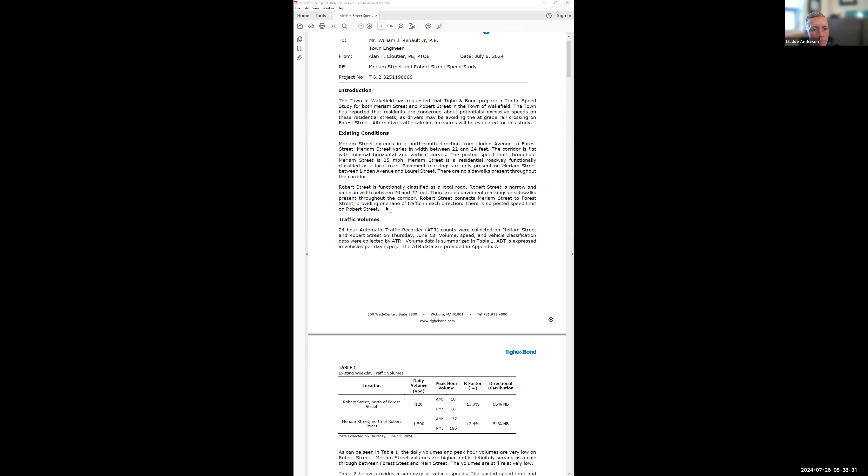Okay. So basically, looking essentially at the speed related items. The big one we want to look at is our 85th percentile speeds based on speed limits that are out there. And you can see that going north of Robert Street, we do have speeds in excess of 5 miles an hour. Typically, we look at 10 as our magic number to see if it's really an issue. Although we do see some sections where some of the speeds were recorded to be upwards of 43, 42 miles an hour, which I'm sure is what most of the folks are seeing out there and what you folks are probably focusing on realistically.

So we've identified a couple of options and recommendations from Tighe and Bond on ways to look at improving. The first deployment would be the radar speed sign, so folks will know what they're doing, posted with the actual speed limit for the area. So that's what I'm proposing at this point that we would move forward with. This would also collect additional data, so we'd see if this is working or if it's not. If that's not working after we look at it for a few months,

we would look to move into a chicane configuration, which really alternates and makes folks have to slalom through the straightaway. So we would have little bump outs in different sections that would be staggered that would require folks to go around them to slow them down. So that'll be more of a built condition. That's how we would look to correct the problem out here.

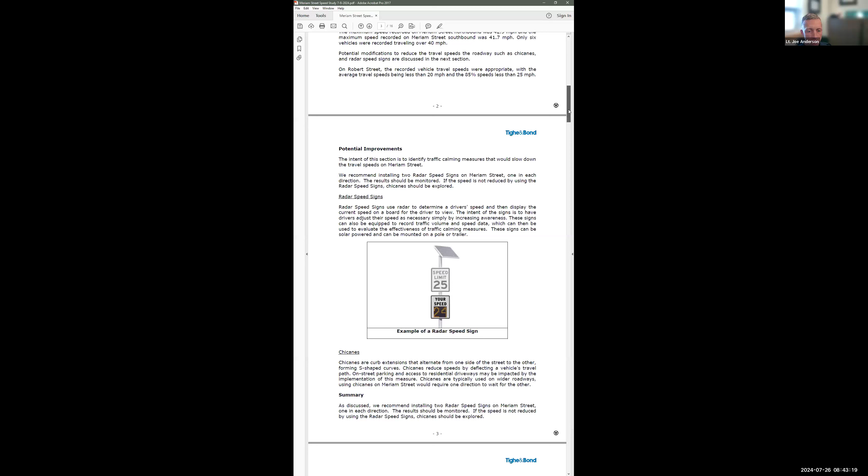But that's temporary. We do have some of these signs that are easily deployable, but the DPW does a great job getting them out there and moving them around as needed. Those are to hit areas in town where the speed trailer would be taking up the whole sidewalk, or could be struck in the middle of the road, or there's no good place to put it to get solar. So we have those smaller signs that we deploy and move around,

but this would be a more permanent solution for the time being for Meriam Street. It wouldn't be moved. It would stay for the length of time that's determined by the policy. And then at that point, we would reassess. So I'll turn it over to Danielle.

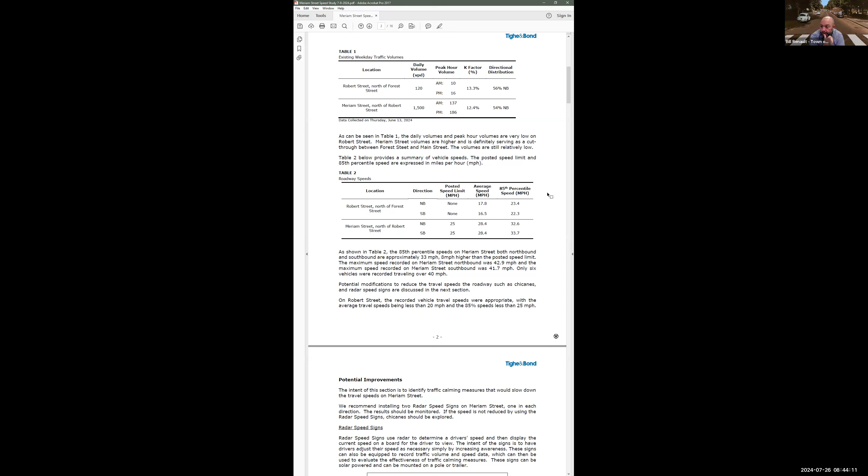If I can just chime in quickly, just to highlight again, we also looked at Robert Street as well. Those are well within the speed limit currently, so we wouldn't be looking to deploy anything on Robert. It would just be on Meriam. Right, and Robert Street, I don't even think meets the volume. Under 400 vehicles per day, 0 points are assigned per the policy. Whereas Meriam Street does see a bulk of the cut-through traffic.

They're at, according to the study, 1,500 daily volume, and our policy says anything over 1,000 to 2,000 is assigned 10 points. No sidewalks assigns an additional 5 points, and then depending on what 85th percentile you're looking at, if you look at the 33.7 rounded up to 34, you're talking about roughly 9 miles an hour over. That brings it into the 10-point range, again, because it is a 25-mile-an-hour zone there. It's a special speed regulation.

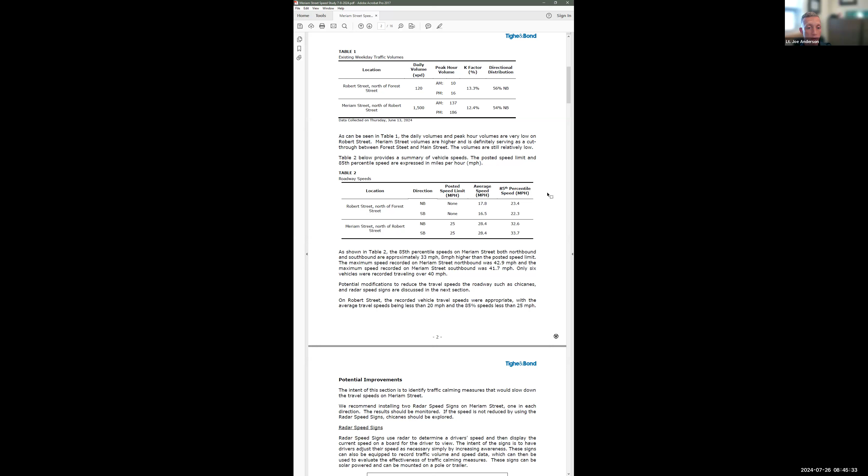So that would be a criteria that we would weigh whether we spend the 6,000 to 7,000 on these signs, which is roughly what they cost, against another street that might be competing for a similar traffic calming measure. But as it stands right now, this is the only active application that's progressed to the point of obtaining all the signatures, having a speed study done, and being ready to move forward with a traffic calming measure. So I see no reason to hold this up and rank it against potential other applications. It's a fairly low cost item, so I think it's something we should move forward on.

Anything else from any members of traffic advisory before I turn it over to Danielle? All right, Danielle, what do you have for us? I just wanted to thank you all for taking it into consideration and having such a very structured process to go through. I appreciate that, and I know everyone in our community is going to be really appreciative of this.

The only other thing that I wanted to note is that there's no stop signs in our neighborhood. I don't know if that's normal, but not even at the end of Meriam Street going towards Forest. At Forest Street or at Robert Street? Forest.

Okay, yeah, we can. Forest and Meriam, that makes sense. We can make that happen. Yeah, it's just very weird how there's no stop signs. Like, people stop, but that was the last comment. And again, thank you. I appreciate it.

Do you know time-wise when we would expect to see things start to move forward? So typically, according to our policy, we'd have to now have you take this application with the estimated costs for this traffic calming solution, have everybody sign off on it, and that they want to move forward with it. But I think, Bill, correct me if I'm wrong, that's going to be more for a permanent solution. Like if we were going to install the chicanes or do something that's going to be a real big ticket item. That's how I've always applied it.

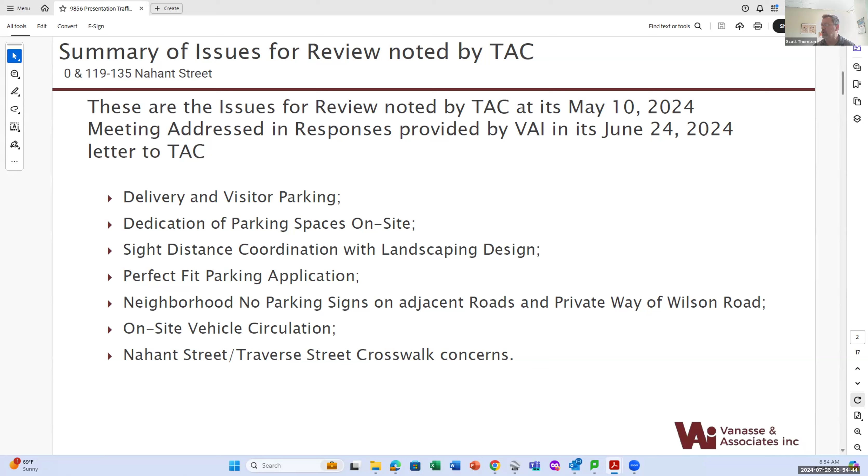So the first issue related to delivery and visitor parking, and I'll jump to the site plan in a second, but there were questions about where vehicles and certain activities would take place. We had proposed that there's 4 spaces along the west side of the building. We're proposing that moving trucks can park in those 4 parallel spaces. Parcel and mail delivery can also be accommodated in the two southernmost spaces along that driveway.

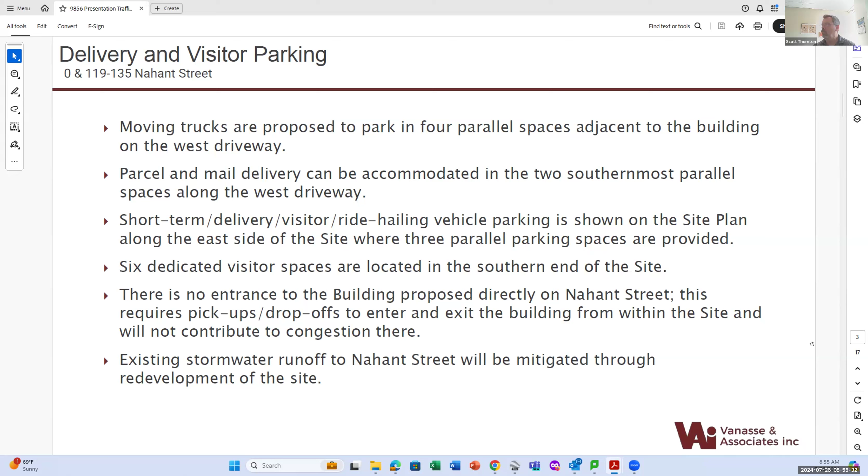I'm just going to jump to the site plan for a second. So these are the spaces that are in question. There's 4 20-foot spaces in this area. The southernmost spaces that could be used for package delivery are in this area. The mail room is in this general vicinity, so that's the shortest walk to get the materials delivered. A second area for short-term deliveries is in the 3 parallel spaces off on the east side of the building.

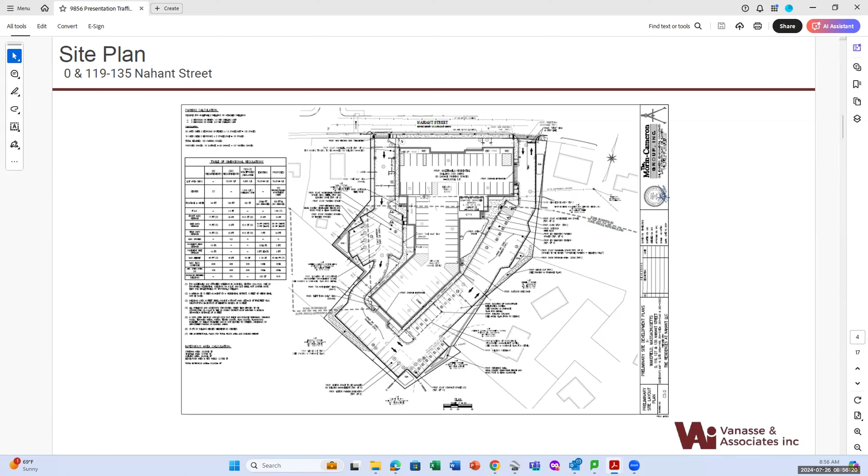Scott, could I get you to blow that up a little bit? Sure. Much better. Okay.

So the three spaces are in this area, right opposite the lobby. We expect that for things like Uber pickups, Uber Eats, these are the right locations for those activities to take place. We're proposing that there'll be wayfinding signs located at the driveways for trucks to enter the west driveway, probably post them at the east driveway as well. There's better visibility in this area in the case of pedestrians walking back and forth between the Uber vehicles and the lobby. So we anticipate this is a better location for that activity to take place.

There was also a comment about visitor spaces. There's 6 visitor spaces that have been dedicated in this area. We think that this is a good location for the visitor spaces because obviously we want to maintain the closest spaces for the residents, as they'll be the ones that are going to use those most frequently.

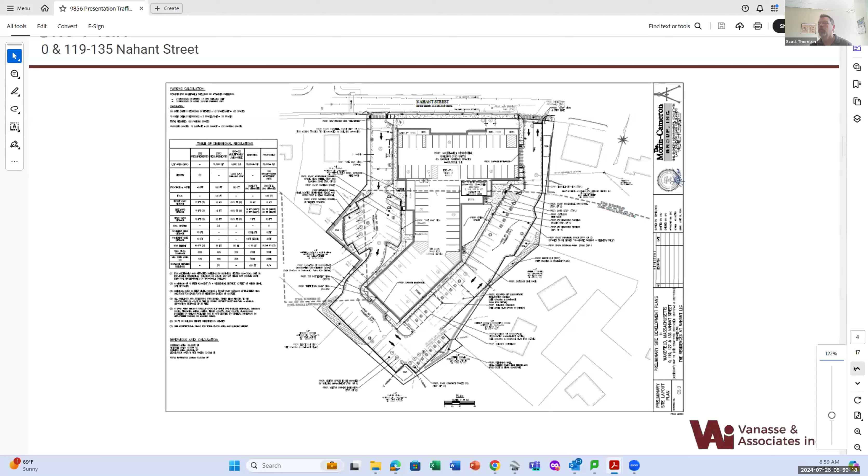And Scott, on the west driveway, were those few spaces there for moving trucks? Did I read that right before? Yes. Could they potentially be used for delivery drivers as well? They could be, yes. And possibly an ambulance or a fire engine could park there, although where's the entrance? The only entrance is on the other side, or is there a second? No, I believe there's another entrance right in this area. Okay. All right, just wanted to clarify that. Thanks.

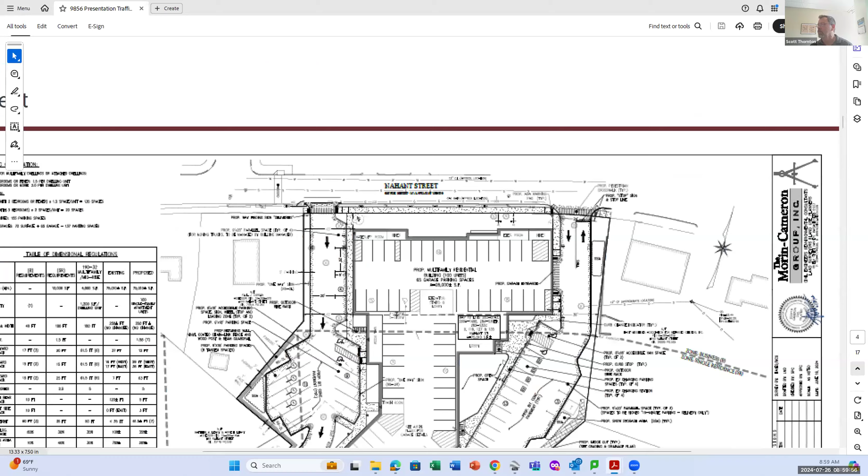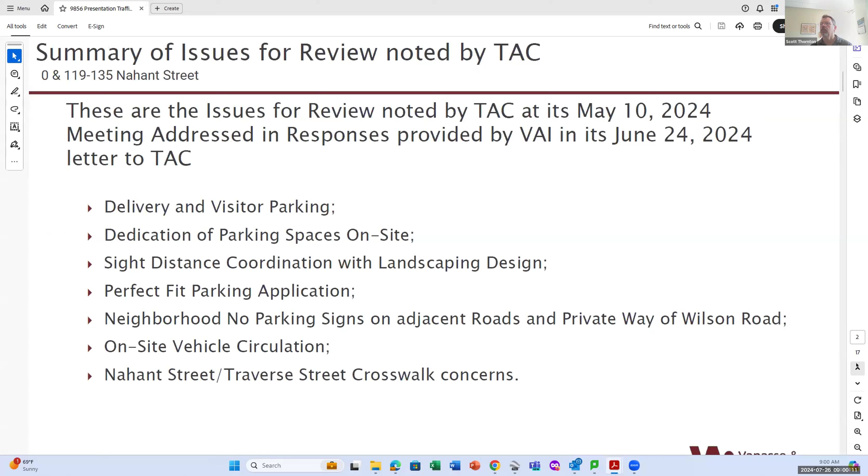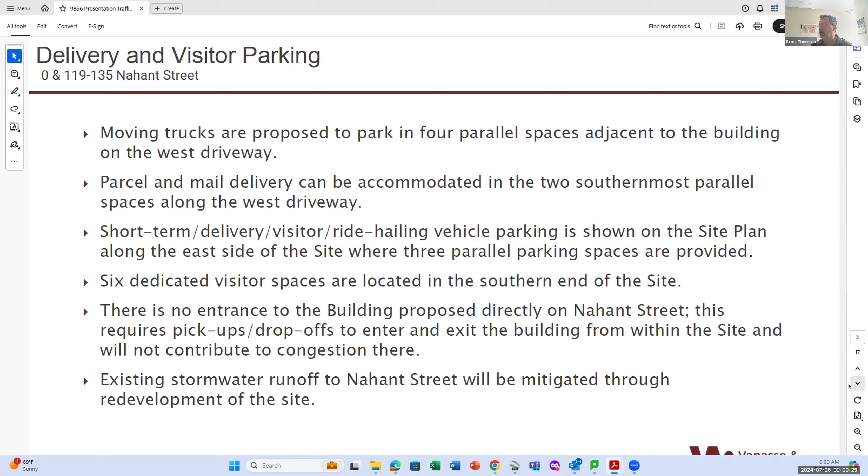Right, so back out here. Right, so the last comment that I wanted to touch on was that there have been concerns about stormwater runoff from the existing site that currently goes out to Nahant Street. Scott Cameron can get into more detail on that if needed, but in general, the way the site is being designed, all the existing runoff or drainage on site will be captured on site, so there won't be any runoff onto Nahant Street once the development is constructed. The plan is to retain all that drainage on site.

And if I may just jump in very quickly, that came up in the context of a safety issue in freezing. The concern expressed was there'd be more runoff generated from the site that would freeze along the sidewalk in Nahant Street, and we want to address that head on. Scott can speak to it much more clearly, but that is not going to happen. As Scott Thornton indicated, all runoff is being handled on site. And we make the condition better, not worse, than the existing condition. Thank you.

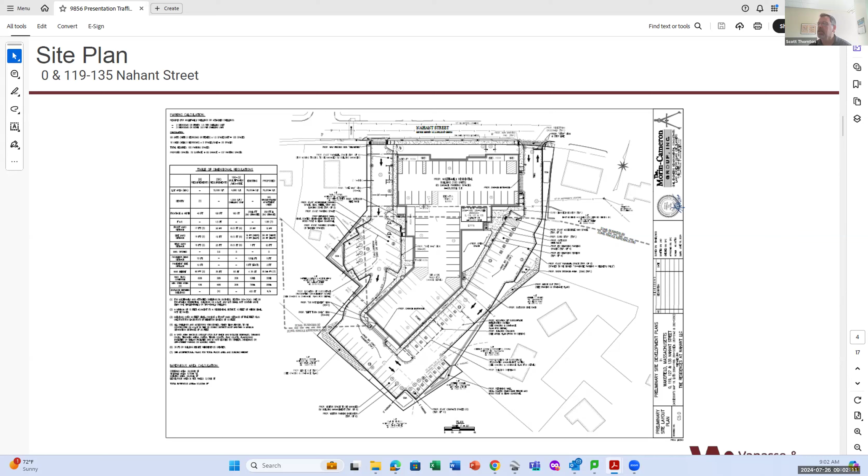So then, discussion of the parking spaces on site. I believe there had been some discussion from the TAC about dedication of spaces within the garage and in the tandem area in order to minimize the potential for hunting around for parking spaces. We think that's a great idea. So what we're proposing is the spaces in the northern garage, accessed from the connection to the east driveway, and the lower garage. These garages are not connected, but the lower garage is accessed through a connection to the south, and there'll be do not enter signs posted where the west driveway comes into the south part of the parking area. These tandem spaces are proposed to be reserved for residents with more than one car or in the 2 and 3 bedroom units.

Similarly, the spaces in the garages would be dedicated. We expect that they'll be more coveted for weather protection than the surface spaces, so those will be reserved for specific users to minimize that hunting around for a parking spot. And then we have 4 EV spaces, located in this area closest to Nahant Street. That had been a common theme the fire department raised with the EV chargers. They wanted easy access to those spaces and not have them in the garage, so in the event of a vehicle fire they could get to it quickly. So that's the proposal for the EV spaces.

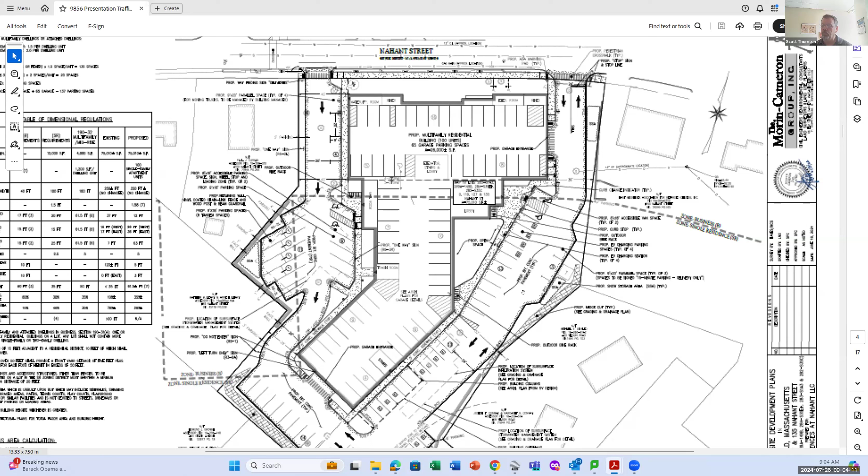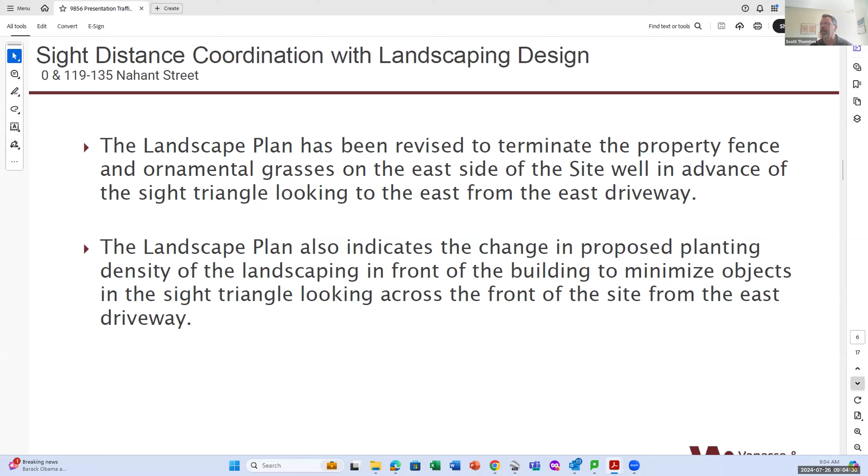Okay, so we went through these. As far as the sight distance coordination with the landscaping design, admittedly, the sight distance was addressed, but the landscaping design needed to be tweaked a little bit to account for it. We previously had a vinyl fence that went out past the edge of where a vehicle would need to see for the sight distance, looking to the right. That has been pulled back, and landscaping has also been pulled back away from the edge of that fence.

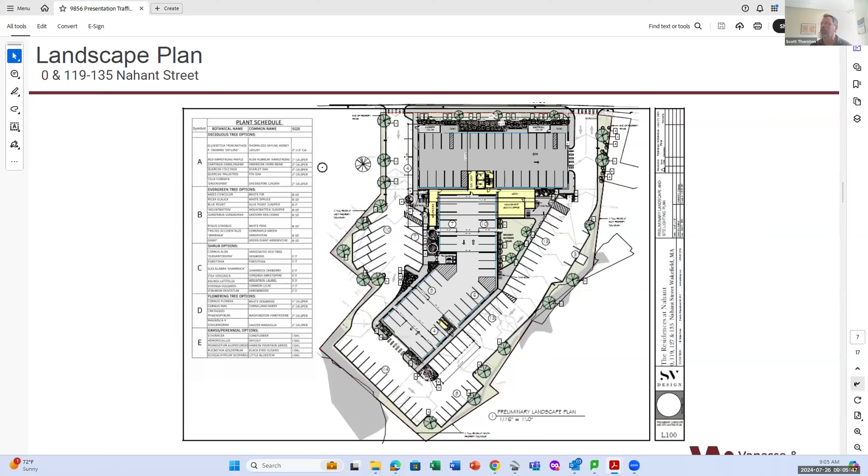And I don't know if you recall, but the landscaping in the front of the building had been pretty dense, a number of trees and shrubs proposed right along the back of the sidewalk. That has been cleaned up a little bit, de-densified, if you will, so that there's more visibility for a vehicle looking through the proposed vegetation. And this is what I'm talking about. In this area, we wanted to minimize the landscaping so that it's less restrictive to a vehicle looking to turn either left or right out of the site.

Next issue was the perfect fit parking application. And there's a lot of information here, but basically what we wanted to show was that the perfect fit parking report has a pretty substantial database, initially looking at 200 developments. Up to the latest phase, they've looked at 211 complexes.

Parking in general was provided at a rate of between 0.25 and 2 spaces per unit, with an average of one space per unit, but only 70% of those spaces were full when surveyed. And in affordable housing developments, the parking rate was observed to be even lower at only 0.55 cars parked per unit.

Through the latest phase, which goes to locations further away from Boston, looking at Needham, Newton, Sudbury, and Waltham, 211 apartment complexes have been studied with an average demand of 0.75 spaces per unit. In fact, those 4 towns have actually got a rate of under 1 space per unit, and that's based on the surveys done at night for peak demand period for residential developments, and showing a demand ratio of 0.9 spaces per unit.

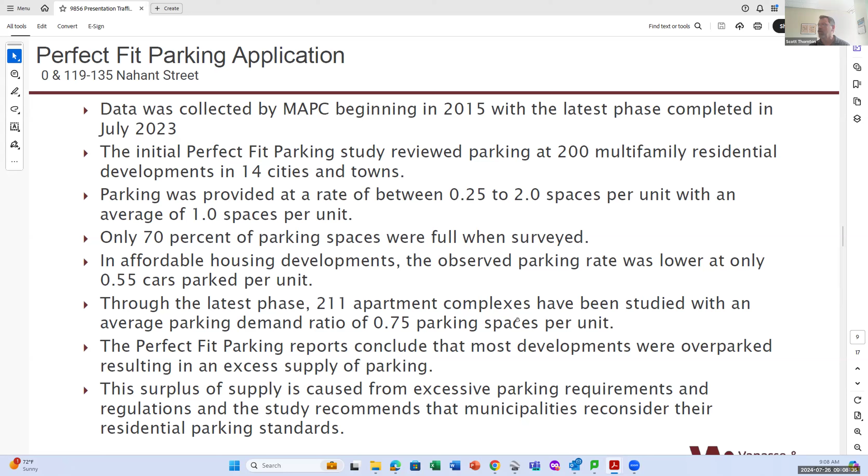Secondarily to that was access to jobs and deed restricted affordable housing. But the surplus of supply is caused from excessive parking requirements, and the study recommends in general that municipalities reconsider their residential parking standards.

The next issue had to do with no parking signs. Parking on side streets for residents is allowed in the existing conditions. And we still think that the development is going to have sufficient parking supply for the residents, the guests, and visitors, and there will not need to be any parking off-site. I know we had made this point previously that we don't object to any installation of no parking signs on adjacent streets if the town is willing to do that or feels the need to do that.

There was some discussion about Wilson Road, how it was a private street, but there were still people parking on there that were not residents. If it is a private street, then no one who lives on Wilson Road has a right to park there. And Attorney Panos has offered to assist the residents on Wilson Road to install no parking signs if it is a private street.

Scott, I just want to touch on this one while it's fresh in my mind, because I'll probably forget. But as far as the no parking signs, I think it might have been a little bit misunderstood. The point that we were trying to make with having the developer install no parking signs is that now it would restrict the ability for neighboring streets to have the occasional on-street parking space. And I think that's what we see right now.

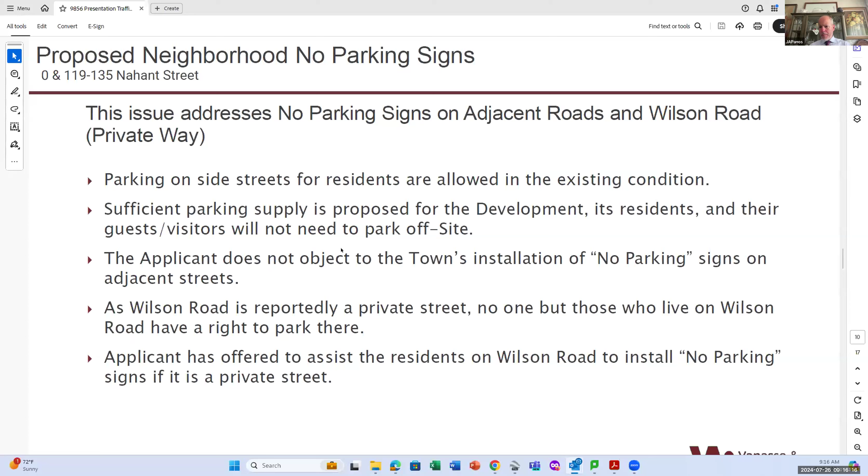Next issue had to do with circulation on site. So we ran AutoTurn exhibits and analyses depicting the paths of trash, delivery, moving trucks, emergency vehicles, and passenger vehicles through the site layout. Again, trucks are proposed to enter the development at the west driveway and exit from the east driveway. Passenger vehicles can enter from either driveway, and then circulate out through the east driveway.

This is the fire truck AutoTurn analysis. We showed the fire truck entering from either driveway. We also showed them exiting either driveway, realizing that most likely they'd be coming in from the west, but if for some reason they came in from the east, they could come through and circulate to the back.

Again, there's room for trucks to pass each other in the back if need be. And then we assumed if that truck needed to exit out through the west driveway, it would be possible for them to do that. This is for the fire truck. We have an analysis of the passenger vehicle. There's no issue with them coming in from the west driveway, from the east driveway. We wanted to show how they would come in. If they wanted to turn around, they could do so using the entrance to the garage.

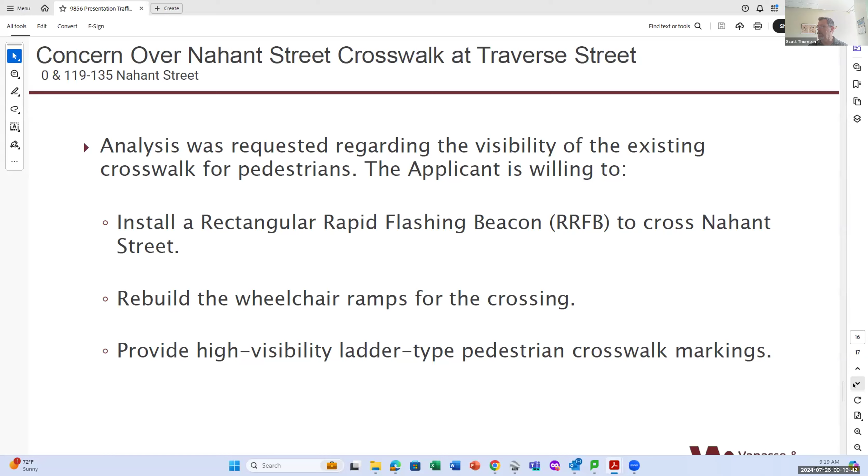And I think the last issue had to do with a concern of pedestrians being able to cross Nahant Street. The existing crosswalk at Traverse Street is faded. The wheelchair ramps are probably not compliant with ADA. And the applicant has agreed to install a push button flasher, RRFB, rectangular rapid flashing beacon, for the purpose of assisting pedestrians to cross at this existing crosswalk.

We're rebuilding the wheelchair ramps there, and then again the push button activated flasher would be installed according to the ADA regulations. I think it's within 4 feet or 3 feet of the actual ramp, and it would be consistent with the current regulations for APS devices. And this is something that the applicant has agreed to install not just for the residents' use, but for the public's use, in order to cross Nahant Street with some assistance with the RRFB, with the flashing strobe lights that get people's attention when they're traveling on Nahant Street. That concludes my presentation. I'll be available for any questions, Lieutenant.

Scott, if a vehicle was exiting the west driveway, which I know has a one-way circulation there, what is the ISD looking left? So let's say a fire engine or wrong-way driver was exiting left. Do you have that available? We looked at it a while ago. I don't have that number in front of me. If the fire truck was exiting, their vantage point is over 6 feet above the pavement, so it's a different criteria than for passenger cars.

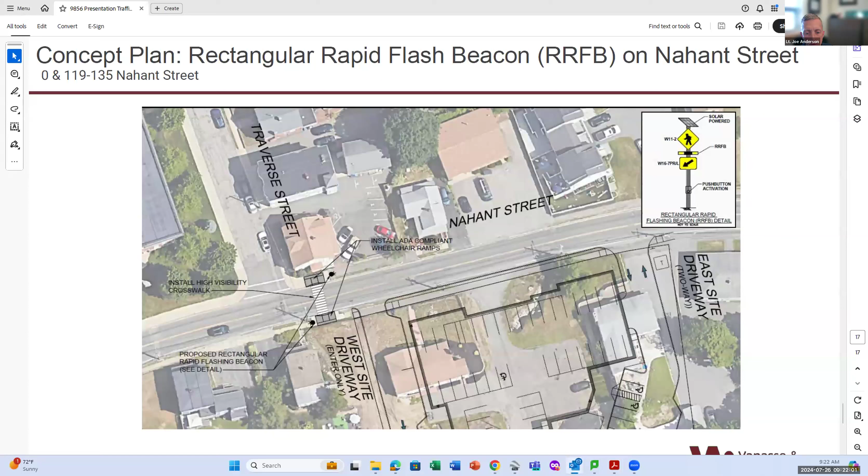I think my concern, and then I'm going to open up to members of TAC, but since we're on this slide, fresh in my mind: let's say there's an ambulance loading a patient over by the delivery space on the east side, and there's a police cruiser there. Just some routine activity that clogs up that two-way east driveway. Your Uber Eats driver, your impatient 18-year-old driver, whatever scenario you want, might go out that wrong way. And I'm curious what that intersection looks like as far as sight distance.

I don't recall exactly what it was, but I think it was poor enough that it was shifted to the east driveway. I have it up, Joe. Yeah, in the original study, the sight distance for the west driveway was recommended 320 feet looking to the west, 290 looking to the east, and the field measurement was 435 looking east and 164 looking to the west. Okay. That's part of why we shifted the access configuration and had the exiting vehicles on the east side. Gotcha. Bill, do you want to start off and then we'll move through?

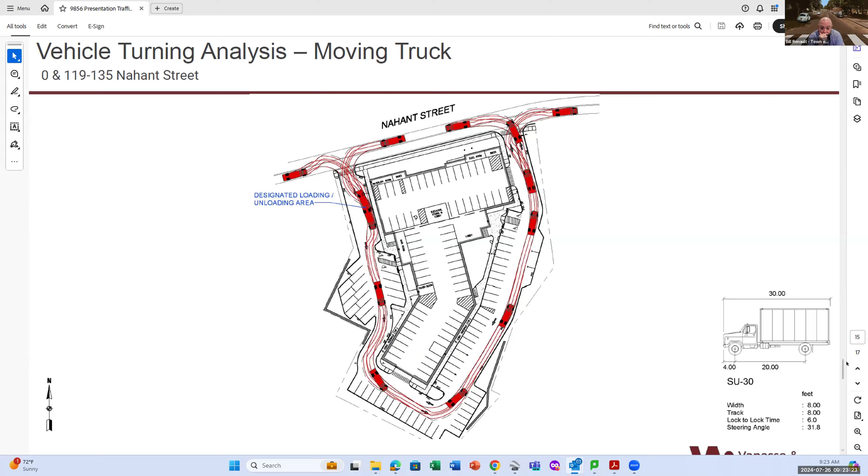Yeah, I'm going to focus on the same piece with the intersection sight distance. Scott, if you jump back to the one that showed the ISD with the little yellow triangle, right? So we're looking at a section for the only exit here for the site that has 160 feet. Where if you reconfigured the site, I don't look at this project as we can only look at the two driveway locations.

You can easily make this work and have the proper intersection sight distance if the existing driveway was used as the driveway for the project. I mean, I get that you want to maximize this building to the nth degree, but you definitely have an ability to solve this potential safety problem that we've highlighted a couple of times. Obviously, it's not just you, it's the team, as the design team. I mean, this is very solvable.

And to me it just doesn't seem to jive. I said when I was on the ZBA meeting, I don't like the location of the trash truck because you're in the one-way drive aisle. At least it would need to go to the other drive aisle so that people can get around it. I don't like the configuration of how you have half of your folks entering where potential fire trucks will be blocked. You would have a trash truck that's going to block it that we know is going to happen.

If there's a chance for any of the deliveries to happen in that location where you're planning it, people still can't get around. I mean, all of those, to me, you're kind of designing into pinch points and into problems based on a building that you folks are assuming is fixed, which shouldn't be. And these things need to be addressed. I mean, we've gone back and forth whether the building's too big for the site. Yeah, I think everybody probably thinks it is.

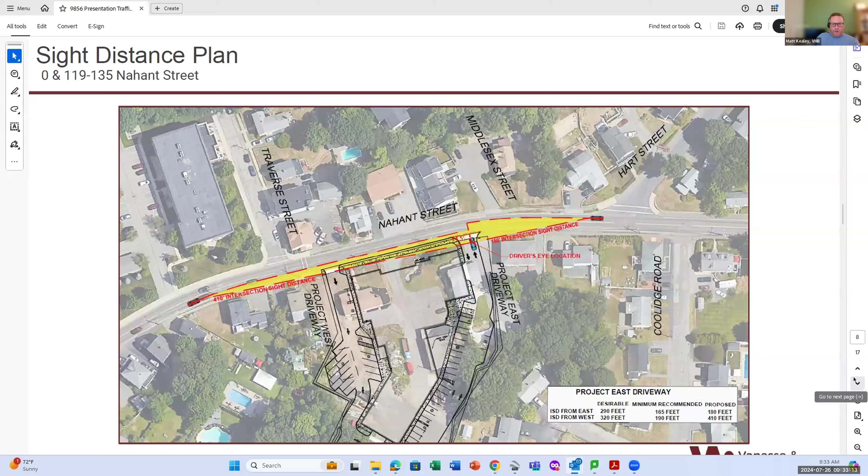Matt, anything else before I continue? One minor clarification just on the site circulation. I wasn't necessarily focused too much on the auto turn and whether or not vehicles could reverse direction. It's just the fact that that's your permanent condition, that someone coming into that driveway and driving to the back of the building, if they don't find a space, they have to turn around. I think it's just an undesirable permanent condition. I appreciate that they can make the 3-point turn and turn around, but for everyday living, that's kind of undesirable in my opinion.

Right. So I think this graphic was specifically prepared because there was a comment that said what happens when people come around from the east driveway and need to turn around. So that's why. I would think most people would come in from the west side or the west driveway, and they have the more spaces that are available for them.

Right, but if someone comes in from both directions, they meet at the bottom of that driveway there, and one of them has to turn around. Yep, but there's sufficient room. I mean, no, I get it. It's just not ideal. It's not that they can't do it. It's just some undesirable interaction. That's all. Just wanted to clarify my point from last meeting.

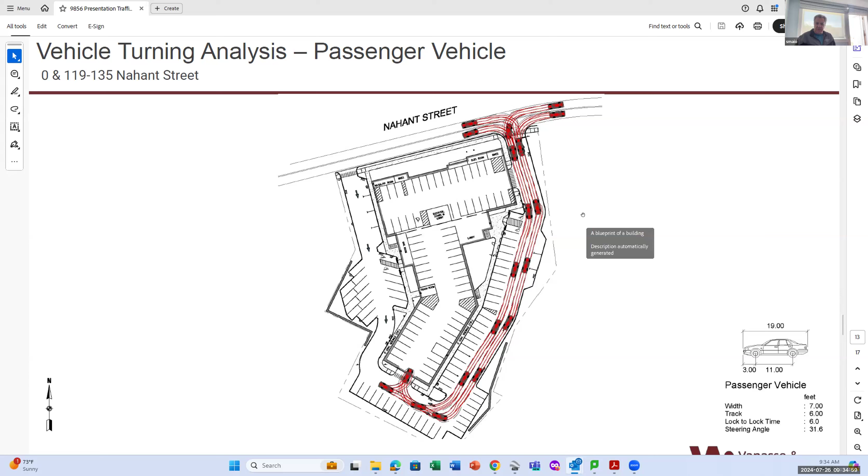Hey, Mr. Mayo, do you have anything for us? I'm just going to go through the members. Sorry, I'd like to hear from, I think I saw Deputy or Provisional Chief Purcell on, because what Matt mentioned about the cars, the fire engine scares the hell out of me turning around there if that was ever going to happen. So I saw Deputy on. I hope he still is. Chief, I just don't see it. If you're on with us still.

Yeah. You hear me? We have you. Yep. Yeah, I've been listening. I'm here.

Yeah, it's to concur with the engineer. The sight lines, I'd love to have the building be pushed back a little bit because it gives us more room to operate in the street, and ladders from the front. It's very tight. You can never tell till these things are laid out what it really looks like. I do like the fact that we can get around the building. 90% of the new buildings don't allow access to 3 sides of the building, but it's not desirable. It's too tight. We're going to get hung up in there.

It is what it is. I can already tell you that by looking at it. We certainly can't turn around, or any hammerhead turnaround won't work, but right. That's okay. It's just tight. It's very tight for the ladder truck. Everybody does the schematic. They lay it out with the size of our apparatus. Turning in west or east from the Nahant Street, we'll be into oncoming traffic trying to swing these things in there, no question. We'll get hung up with the ambulance.

We keep our apparatus in the street as much as we can, unless we go to fireground operations, and then we're gonna run into the parking issues, the people that are parking within the complex, things like that. It's not perfect. We always make it work, but it's definitely an issue all the way around. Anyway, that's all I got. You can never quite tell till the pavement is on the ground with these things, and by then it's too late.

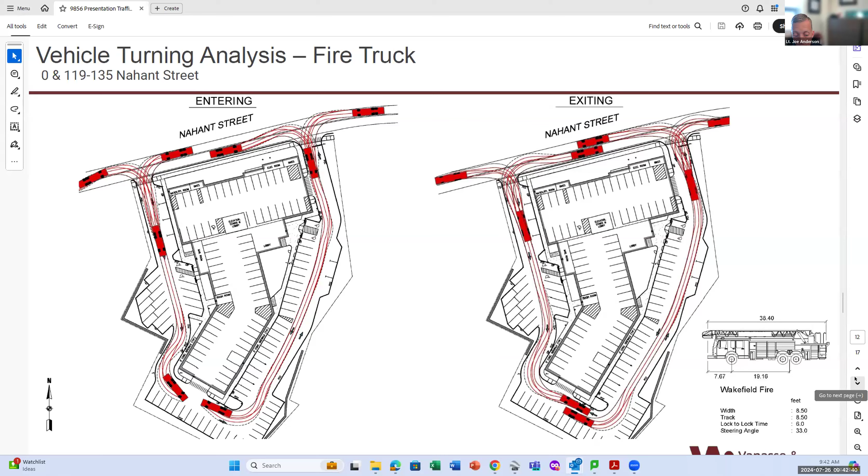the industry standards. And our job is to listen to members of the public and hear their firsthand account, which in my opinion is evidence. This is not a board, it's a committee, but their testimony as residents is evidence. I believe my testimony as a police lieutenant in charge of traffic, a police officer for 2 decades, is evidence. The crash history is evidence. Much of what's been presented by the development team in the traffic impact assessment is evidence that there are some serious issues here, and we're concerned as a committee.

Now, what the Zoning Board of Appeals does with that, I'm not really sure. But my job as the chair of the TAC, and I think every member here, is to raise these concerns, to try to flush out what's probable, what's possible, what's unlikely, and what the concerns of the residents are. And I think their concerns go far beyond, we just don't want a big building near our house. I've heard a lot of concerns that quite frankly hold a lot of water for some safety issues and for some undue impact on the neighborhood that just isn't fair to them.

So there's a lot of issues here, and to say that we haven't provided evidence, I believe our residents have provided a ton of evidence. Your own traffic impact assessment has provided evidence against the safety of this project. And the questions we've raised have been quite a bit of evidence that there are concerns here. We can go back and forth about what industry standards are, but at the end of the day, our job as a committee is to look at this through the lens of common sense and firsthand experience. That's why we have subject matter experts.

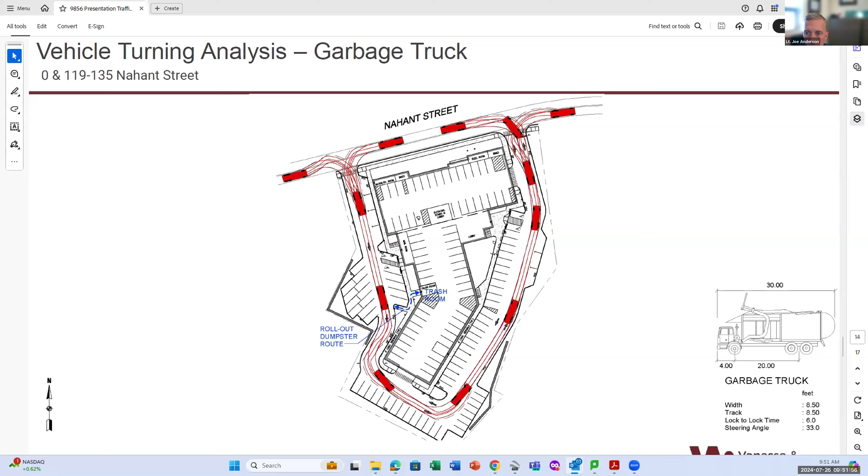All right, thank you, Chief. Anybody else from traffic advisory before I open it up to members of the public for public comment? Okay, I know there's a lot of interest in this agenda item, so if you could raise your hand, and I'm going to keep it to 3 minutes, and I'm going to kind of hold you to it. I know I sometimes let you go a little bit beyond the 3 minutes, but in the interest of letting everybody be able to speak, I'm going to try to stick to that. So if you could identify yourself by name and address, and I'll start with Paula. Paula, good morning. Hi.

Hi. So I'm at 10 Wilson Road, and I've been there for almost 60 years. And let me start by saying there has never in 60 years' time been a car parked in front of my house. Never has it occurred, not even my own guest. So any cars that are coming to that area, I'm going to assume are a direct result of that building that's being put next door. We have no problem at all right now on Harding, Wilson, or Coolidge with any overflow traffic at all. I would never, ever dream of having to call anybody to tow anybody.

That's number one. Number two, all the things associated with this monstrosity are based on a perfect scenario. Well, if this happens, we can do this. And this is what we have. We've got exact numbers right down to the T. When in this world is anything perfect? Can anybody tell me, when do we live in a perfect world? Never. Nobody is ever going to follow those signs. I'm just going to tell you, I've been there all my life. They're going to simply ignore them.